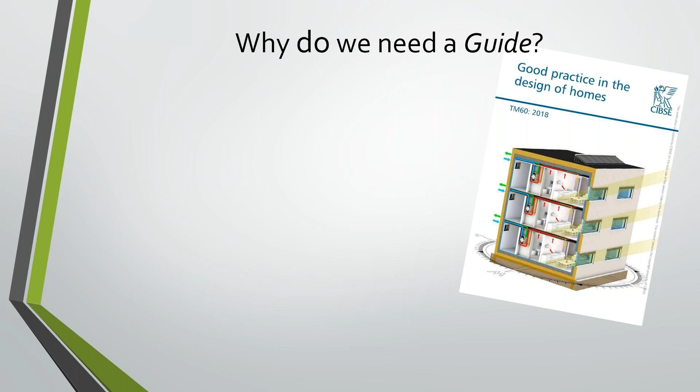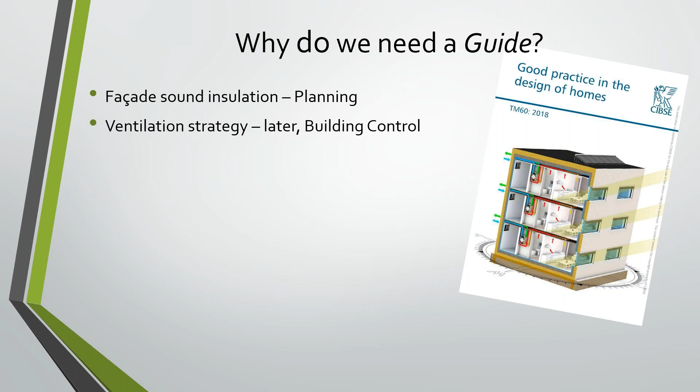Our experience, if we look at the current state of the industry - what goes on at the minute? Where we carry out facade sound insulation assessments, these are required for planning, as Ben mentioned. So the assessment is considered usually by the Environmental Health Department, who the planners refer to on matters of noise. The ventilation strategy may not even be determined at the planning stage, and it's going to be monitored through the building control process anyway. Because building control and planning are separate functions, they don't need to coordinate with each other. So there may be assumptions about the windows being closed to achieve reasonable internal noise levels in the facade assessment, whereas the ventilation strategy may actually require windows to be open for part of the year to achieve reasonable internal air quality.

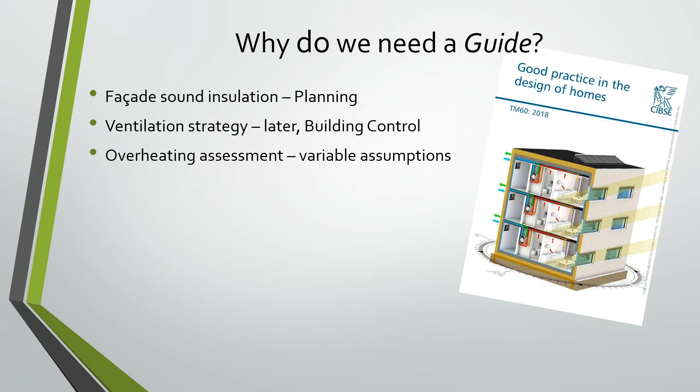We know that overheating assessments aren't regularly carried out everywhere at the minute, but here we have the assumptions. What we always suspected was that the overheating assessment may assume that windows will be open, when the facade sound insulation assessment will assume that the windows will be closed.

My colleague Nick Conlan presented a paper at the Institute of Acoustics just on Monday of this week, in which we reviewed 160 planning applications in London between 2014 and 2017. We just looked at the major developments for more than 100 dwellings. What we found was that 85% of them made this assessment, where the windows were assumed to be open for the overheating assessment and closed for the acoustic assessment.

So what we're doing at the minute is, in general, designing dwellings and allowing people the choice of reasonable noise levels or reasonable temperatures, but not both. So I'm sure you'll agree that's a pretty embarrassing state for our industry, really.

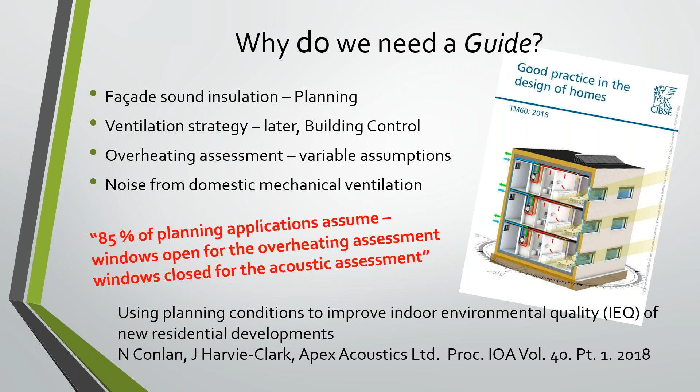We were aware of this a few years ago. There's another issue about noise from domestic mechanical ventilation systems that I'll talk about later on. But first of all, we need to understand the context for noise in the planning process.

So we have the National Planning Policy Framework and the Noise Policy Statement for England, which talk about how noise should be treated in the planning process. We're all engineers, so what we like is clear design criteria that we can design to and know that we can achieve them. But planning refuses to give us clear criteria like that.

Rather, noise should be considered in terms of its adverse effects. So what this means is, if I show you a picture of a dose-response relationship for noise - along the x-axis we have the sound level, and on the y-axis we have the prevalence of high annoyance. Each one of those dots within that graph is the result of a separate study on the prevalence of annoyance depending on the sound level. You can see the extremely wide range of responses in terms of annoyance to different sound levels that you get in practice.

What planning says is that we need to mitigate and minimize when the sound level goes above what's called the LOAEL, or the lowest observable adverse effect level. Whilst noise might have an impact on health and well-being but doesn't have any adverse effect, we don't need to worry about the level.

Let's say that's there, for example. Below that level, there's no acoustic constraints in the design. Above that level, we need to mitigate and minimize as far as we can, until we get to a higher level where there's a significant observable adverse effect level.

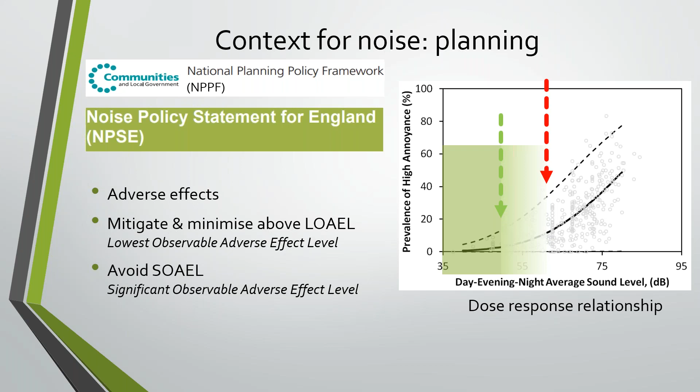We should avoid any impacts above a significant observable adverse effect level. So although there's wide consensus on where that green dotted line may be for different room types, for daytime and nighttime, bedrooms and living rooms, there's not much consensus on where the SOAEL might be for different types of living rooms, bedrooms, and at different times. And planning itself refuses to give any numbers because that suggests that in different contexts, different noise levels may be acceptable.

So to fill the void in the absence of guidance, as Ben mentioned again, the professional practice guidance on planning and noise was produced last year by a group of people who were members of the Institute of Acoustics, Chartered Institute of Environmental Health, and the Association of Noise Consultants.

This describes what good acoustic design is, so how to consider acoustics from an early stage in the design process, in the site layout, orientation of buildings, so that as many residents as possible can enjoy reasonable internal noise levels with open windows. But it says where you rely on closed windows to achieve reasonable internal noise levels, then you should design the accommodation so that it provides good standards of acoustics, ventilation, and thermal comfort. It says that because our group in the Association of Noise Consultants suggested that would be suitable text.

So we've been working since about 2016 to put this guidance together. We're composed of members from across the industry, both independent consultancies and multidisciplinary consultancies. We've also had some input from environmental health practitioners and some mechanical engineers. So I'll hand you over to Anthony now to talk to you about the contents of the guide.

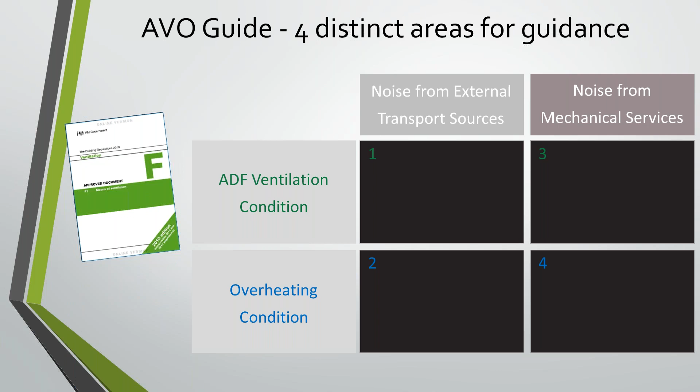There are basically 4 conditions, arising from the combination of 2 different environmental conditions and 2 different sources of noise. The environmental conditions are the ventilation condition, when you're providing ventilation as described in Approved Document Part F, and the overheating condition, when you're applying measures required to meet your overheating criteria, for example as described in TM59. So the ventilation condition is the top row in the table, and the overheating condition is the bottom row.

Then you have the different sources of noise: noise from mechanical services, which is the right-hand column, and noise from external sources, so noises outside the building that break into the building, particularly via ventilation openings. At this stage we've limited the scope to transport sources for simplicity.

In terms of how we've approached the guidance, for mechanical services we've made reference to the CIBSE A guide, and Jack will talk in more detail about that later. For noise from external sources, for the ventilation condition, we've made reference to British Standard BS 8233, which is a quite central document for acousticians, and I'll talk about that in a second. For those 3 conditions we're really just clarifying the situation by referencing existing guidance, whereas for the overheating condition with noise from external sources, there isn't really any existing guidance—that's basically the situation of open windows.

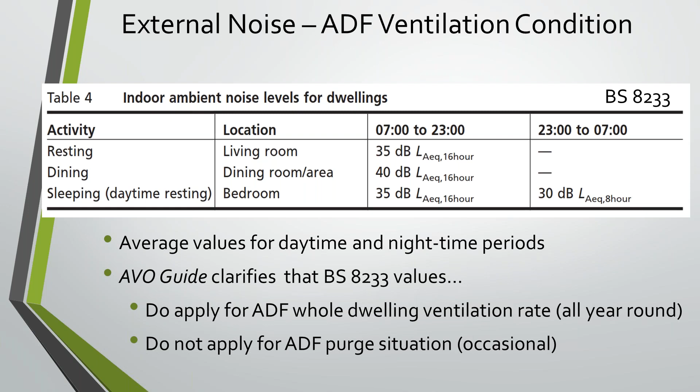The implication of this is that if you're trying to achieve these BS 8233 target levels inside your building, then only certain types of Approved Document Part F ventilation systems may be appropriate depending on your external noise level. That's because the different systems provide different levels of sound insulation from outside, on account of the fact that they require different openings in the facade.

So if we take the case of a bedroom at night where we're trying to achieve 30 dB inside the room, if you were to use a Part F System 1 or System 2, you'd require trickle vents in the facade, and that effectively limits the sound insulation such that you can only really use that system for external noise levels up to around 53 decibels at night. I'd just make the point these are approximate values, because it depends on the details of the geometry of the room and so on, but these are rough figures.

If you then move to Part F System 3, mechanical extract ventilation with trickle vents, you've still got the trickle vents, but now they can be smaller because you have a mechanical driving force, and they can also potentially be attenuated, meaning you can consider that system for higher external noise levels up to around 63 dB. Finally, if you use System 4 MVHR, it's fully ducted. There are no openings in the facade, which means the facade insulation is limited only by the other elements of the facade construction, particularly the glazing.

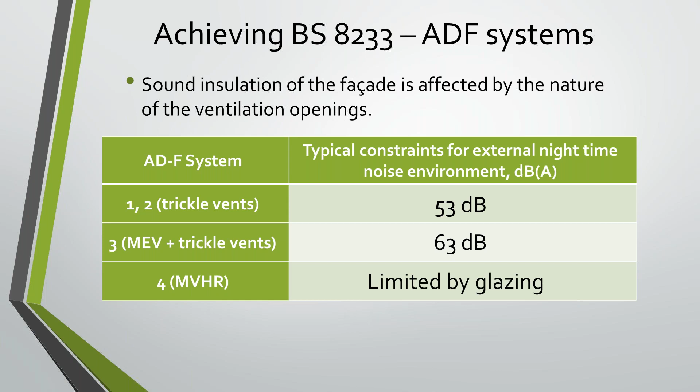Okay, so that's covered box 1.

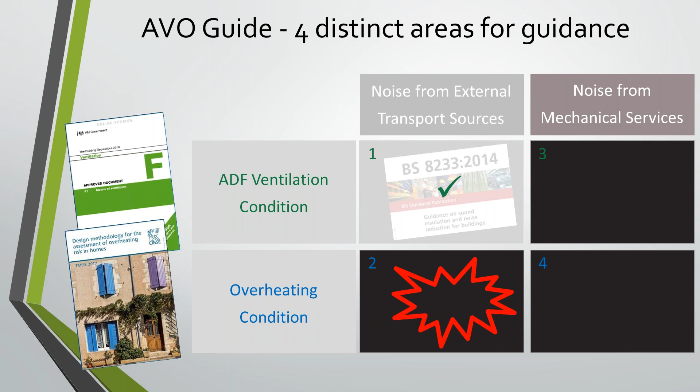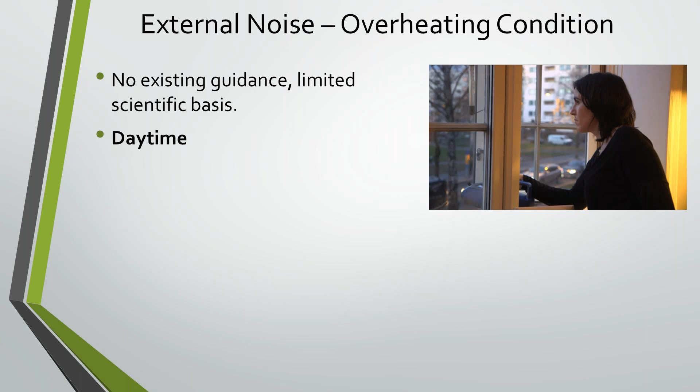Now I'm going to talk about noise from external sources for the overheating condition, so box 2. This was the tricky one because we didn't have any existing guidance we could reference. What we needed to do was think about the noise effects relevant for residential. For daytime, we looked at interference with activities, which particularly comes down to speech. At nighttime, we looked at sleep disturbance. Having identified these effects, we then interrogated a whole load of documents from across Europe to look at guidance which might be relevant.

Based on what we could find, we generated this table, which sets out risk categories determined by the internal noise levels in the daytime and nighttime period. It's set out in quite a similar way to the table in Table 4 from BS 8233. So let's just run through these risk categories.

To start with, we have the negligible risk category at the top, which is equivalent to saying you achieve the values in Table 4 of BS 8233, i.e. that the noise level in your overheating condition is no different from the noise level in your ventilation condition, so that's clearly not a problem.

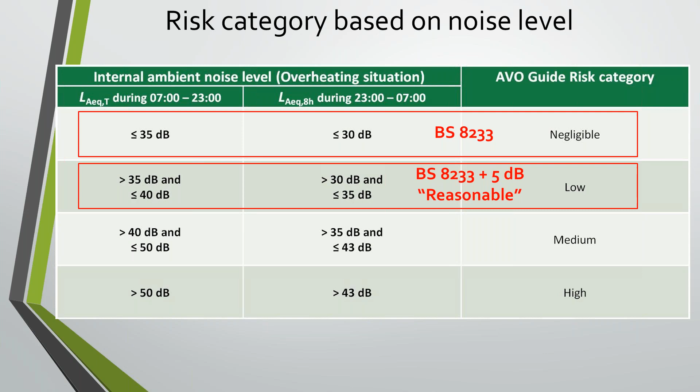The low risk category is equivalent to saying you don't exceed the 8233 values by more than 5 dB, and the reason for that is there's a note in 8233 which says that corresponds to reasonable conditions, so we felt that's a low risk.

The high risk category is defined by the point at which the noise starts to significantly have the effects described. In the daytime, that's the effect on speech communication, and we suggest that above 50 dB inside, speech communication is significantly affected. At night, above 43 dB.

A sizable proportion of the population is highly annoyed and sleep disturbed, and we've derived this figure from some guidance by the WHO night noise guidance, which actually gives the analysis in terms of an external noise level of 55 dB, and we've converted that to 43 internally by assuming that a simple open window for overheating control will give a level difference between inside and outside of roughly 12 dB.

But what about the medium risk category? What do you do with that? How do you assess that category? The key thing is that the adverse effect that comes from noise, which is what's relevant for planning, depends not just on the noise level, so not just where you are in that table in terms of the level, but also on how often you're exposed to that noise level.

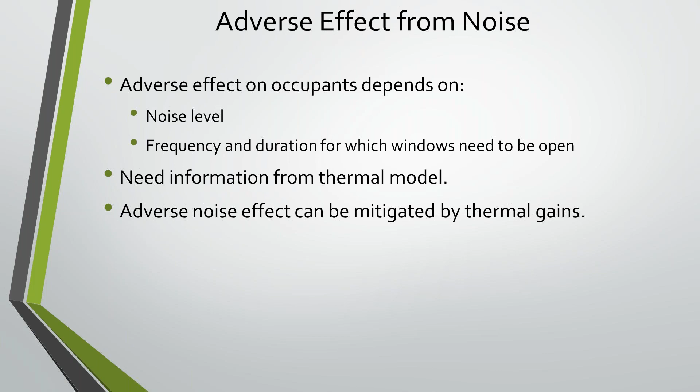There's also the implication that adverse effect from noise can be mitigated not only by reducing the level of noise, but also by reducing thermal gains, because that would reduce the amount of time for which you need to open your window and therefore reduce the effect.

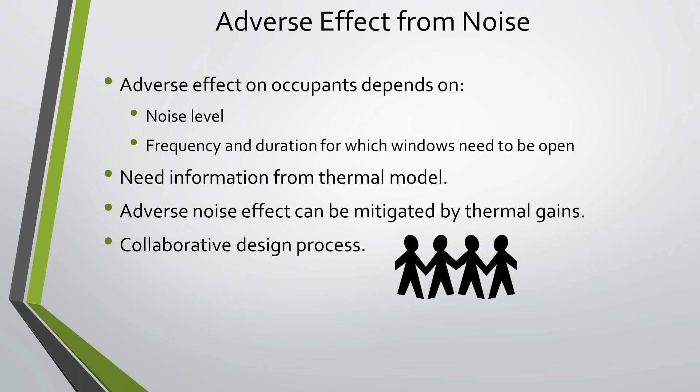So all in all, this comes back to the idea of having a collaborative design process. The document is trying to promote a situation where acousticians come to the design not just presenting constraints, as in saying look, you can't open the windows, which I think is currently a bit how it's perceived, but instead trying to get acousticians aware of the interrelationship between overheating, ventilation and noise, so they can come forward in a more positive way with design solutions and a more joined up process.

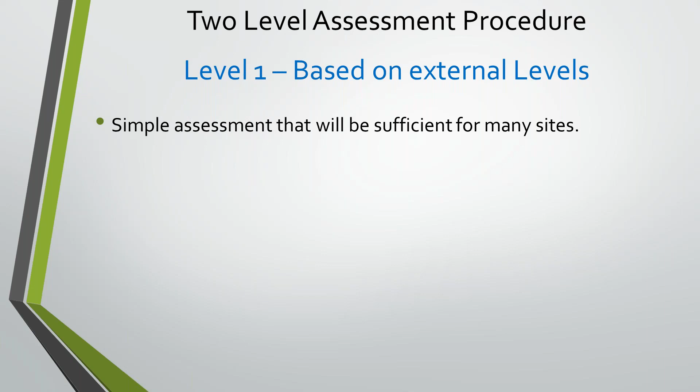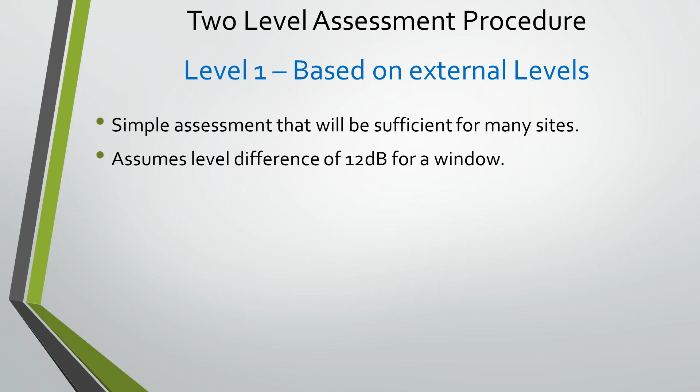Level 1 is based on external noise levels, so the acoustician can simply go to site, measure the noise level and directly do the assessment from that. To make this a simple assessment, we've had to make simplifying assumptions. The key one is that we've assumed the overheating control method is a simple opening window that gives a level difference between inside and outside of roughly 12 dB, i.e. your internal noise level would be 12 dB less than outside when you've got the window open. So that allows you to make the assessment by simply adding 12 dB to the levels in the risk category table presented earlier.

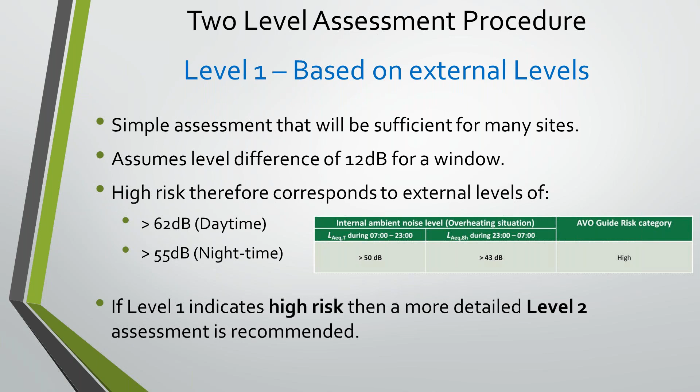For example, you will be in a high risk category if your daytime noise level is over 62 dB externally, or if your nighttime noise level is over 55 dB. If this level 1 assessment indicates you are in a high risk category, we're recommending you then do a level 2 assessment, because that's an indication that opening windows aren't a good strategy and you need to do something else.

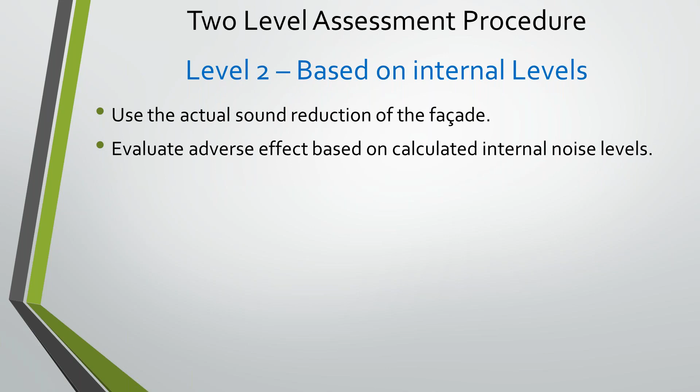The level 2 assessment is based on internal noise levels. So instead of just assuming opening windows, you look at the actual design of your facade and the sound reduction it will achieve. Then you evaluate the internal noise levels from the external noise levels and the sound reduction of your facade, and make an assessment of adverse effects with reference to the risk category table based on the internal noise levels.

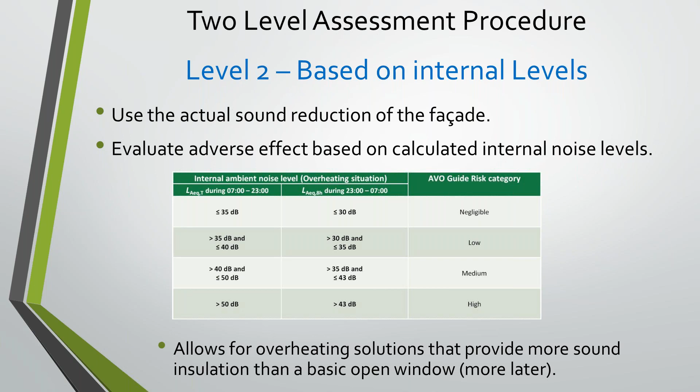That's obviously a more involved procedure because there's more calculation, but the advantage is it allows you to consider designs for controlling overheating that provide a greater degree of sound insulation than you'd get from a basic open window - for example, attenuated vents, which I'll come back to a little later in the presentation. At this point I'm going to hand back over to Jack, who will discuss noise from mechanical services.

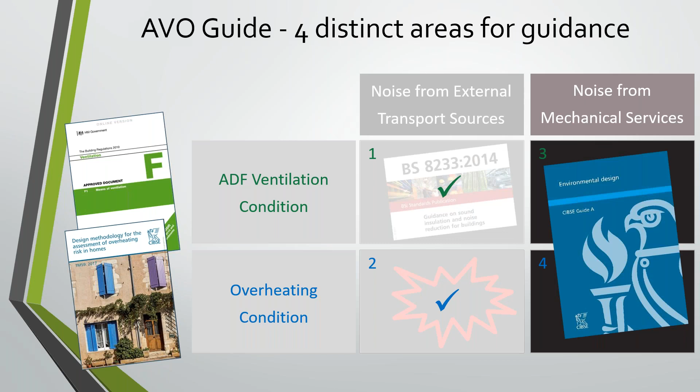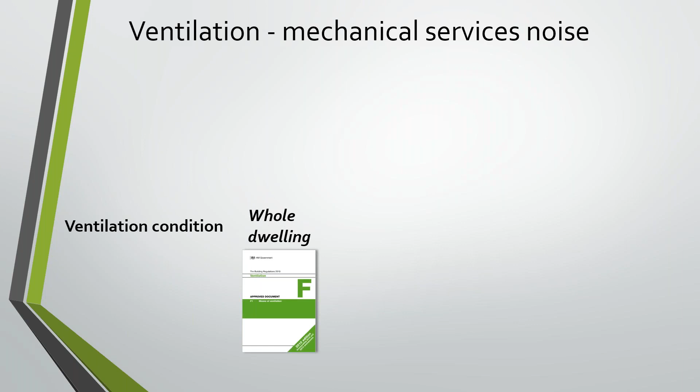Thank you, Anthony. I'm going to talk about how we approach the issue of noise from mechanical services for both ventilation and overheating. Thinking about ventilation first, and distinguishing between the whole dwelling ventilation rate and the extract ventilation condition - there's guidance in Approved Document F that continuously running systems shouldn't exceed 30 dBA in bedrooms and living rooms at the minimum low rate. So we refer to that.

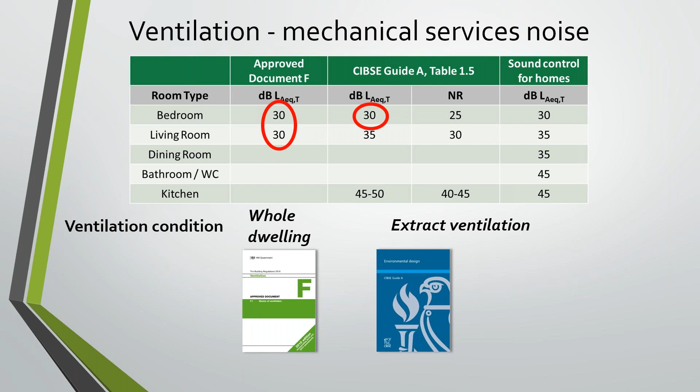For extract ventilation, CIBSE Guide A doesn't appear to distinguish between the different parts of the ventilation condition, but fortunately refers to the same level of 30 dBA in bedrooms, and allows a slightly higher level in living rooms. We also refer to an older publication, Sound Control for Homes, because it has criteria for other room types. There is a question, though, about whether 30 dBA is suitable for bedrooms.

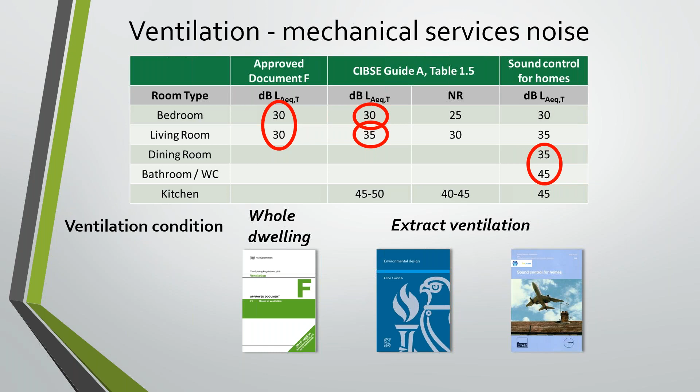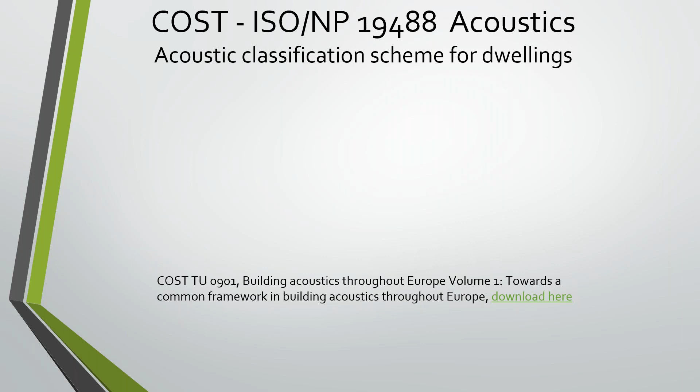There was a big European collaboration of acousticians within the COST Action TU0901 that resulted in ISO 19488, just about to be published. It's an acoustic classification scheme for dwellings, and contains this table for sound levels in buildings due to service equipment - again not distinguishing between ventilation or cooling systems. The highest class requires sound levels less than 20 dBA. You can see that 30 dBA would be class D, suggesting 20% occupant dissatisfaction, or 35 dBA would be class E, with 35% dissatisfaction expected.

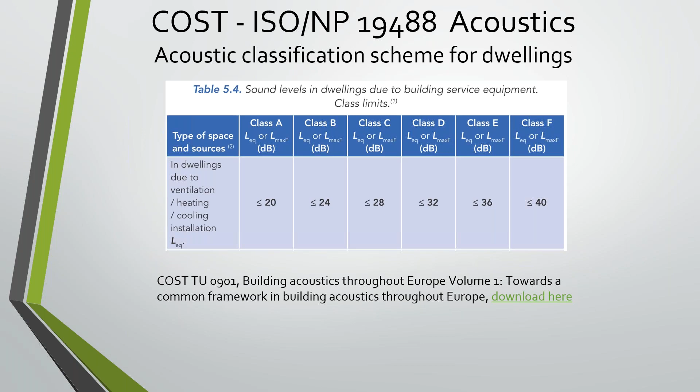If we dig a little deeper and look at the actual evidence for people's tolerance of sound levels in their own homes from domestic mechanical ventilation systems, the best information we have, or really the only information, is from a study in Finland in 2007. It was quite extensive, 102 homes, investigating the then Finnish building regulations for half an air change an hour and a sound level limit of 28 dBA.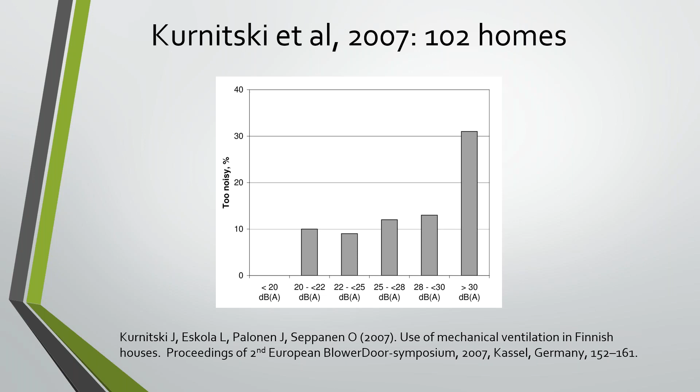Because it's a cumulative distribution, if we move across the columns to the right, by the time we get up to 30 dBA and add up all those columns, there's more than 40% of people finding that too noisy. This study found that what happened in practice was people turned their systems down or turned them off entirely until they could tolerate the noise. So they operated their ventilation systems based on their noise tolerance, not on the ventilation needed to achieve reasonable internal air quality.

This finding has been found again by other studies across Europe, particularly those that have adopted mechanical ventilation in the same way that we have in the UK, which you might describe as rather haphazard and uncoordinated. They've subsequently introduced a mandatory noise limit in the Netherlands to control noise because it was such a big problem there. A more recent study in Canada...

described that it was the noise in the bathrooms that people objected to, turning their fans off and not turning them on again. This time it wasn't the level of the noise, but just the quality of the noise that caused the problem.

So what do we know about what's happening in the UK then. The Zero Carbon Hub started investigating this because they realised there was a problem, and they found the same type of thing, although on a rather smaller study. People are turning their systems off because they're too noisy. Our experience is that people often don't report this - they turn them off and then report they have no problems with the noise from them. But obviously, if they live in an airtight house, they will suffer the adverse effects of poor indoor air quality.

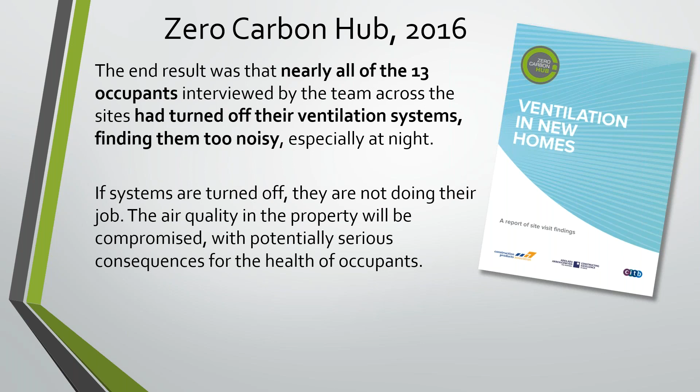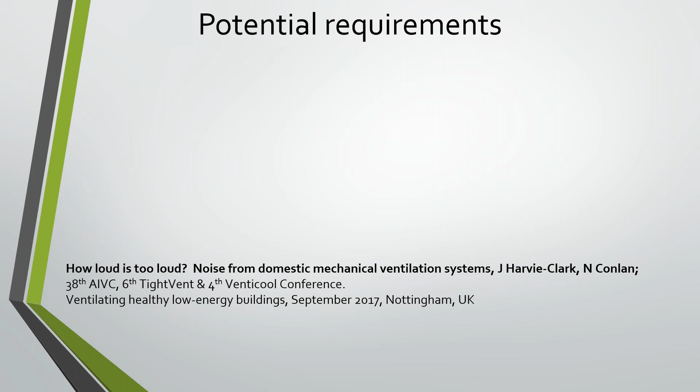So we think that potentially to avoid these problems - and you can read all about this in the paper, which you can get off our website - 30 dBA is likely to be widely unacceptable, and an optimal limit to avoid adverse effects is likely to be around 24 dBA, we think, and higher levels may be acceptable if the quality is okay.

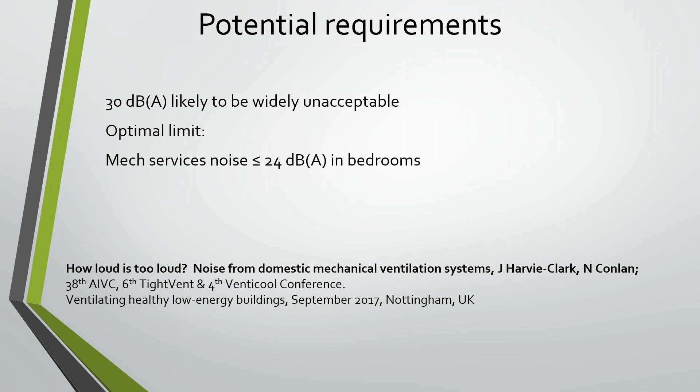So we're currently involved in a bid to the EPSRC to try and get to the bottom of this. Now, this is not in the guide at the minute, but we'd be very interested if any of you have any experience of people complaining about sound levels from ventilation systems and whether you've had any measurements of the sound from them.

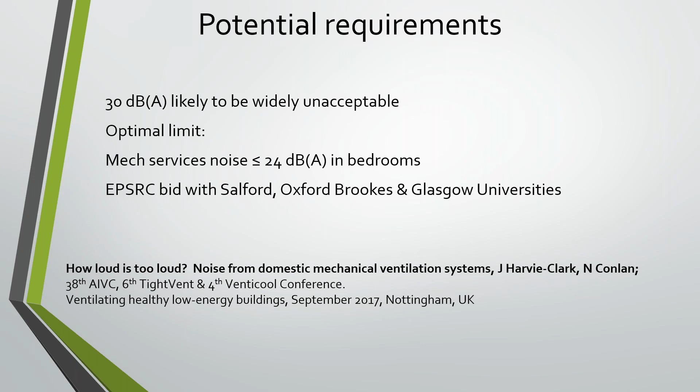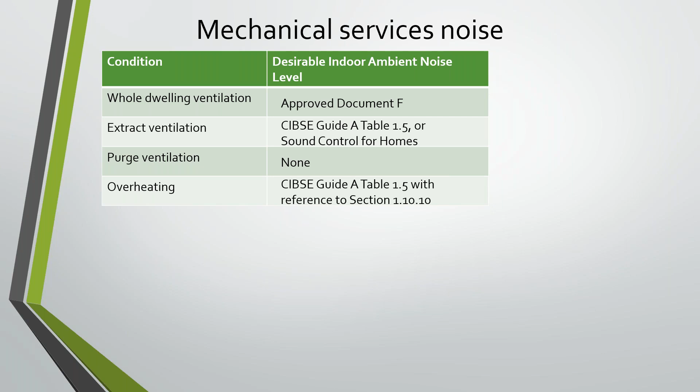So summarising the mechanical services noise issues: we're referring to Approved Document F for whole dwelling ventilation, the CIBSE Guide A for the extract ventilation condition, and as for external sound and purge ventilation, whilst providing purge ventilation for air quality purposes, as opposed to controlling overheating, there's no acoustic criteria associated with that. And for overheating, simply referring back to the CIBSE Guide again, but with particular reference to section 1.10.10, which says that a range of plus or minus 5 dB may be acceptable depending on the particular situation.

So think of it this way: you go into a hotel room, you turn on the comfort cooling system, it's a bit noisy, but you don't mind because when you want it to be quiet, you can turn it off again once you've got the cooling you need. So there may be times when a higher level may be acceptable for overheating where it's under the occupant's control.

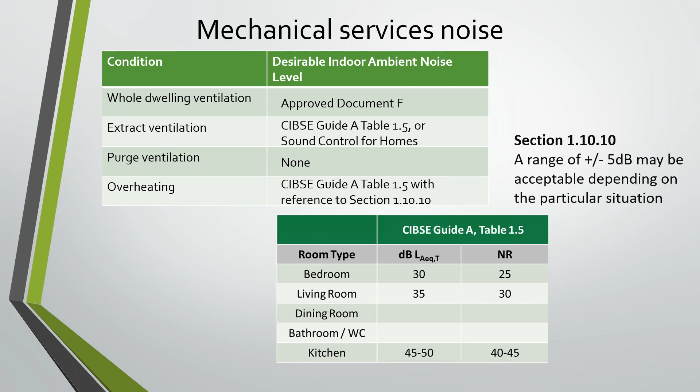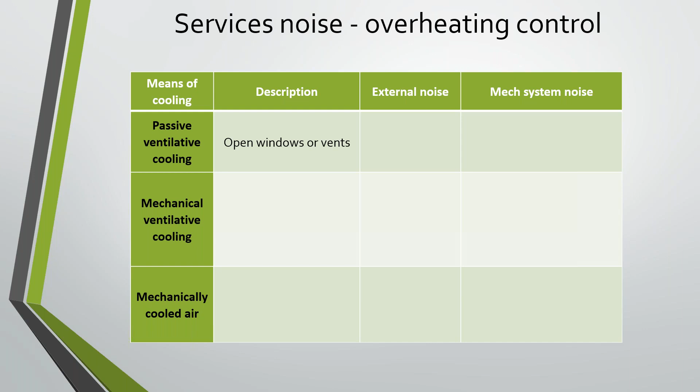So providing advice for acousticians on services noise levels and overheating control is something we do in the guide, because many acousticians aren't aware of the details of ventilation and provisions to mitigate overheating. Passive ventilative cooling obviously relies on openings in the facade, as Anthony described, so it's all about the external noise. And there aren't any mechanical systems noise issues unless ceiling fans are used.

Mechanical ventilative cooling, if suitable or appropriate, doesn't have external noise level limits, but there are likely to be much higher flow rates than required for whole dwelling ventilation rates. So there's noise from the fans and regenerated noise at grills. There is a question about whether using an MVHR system in a boost mode is suitable.

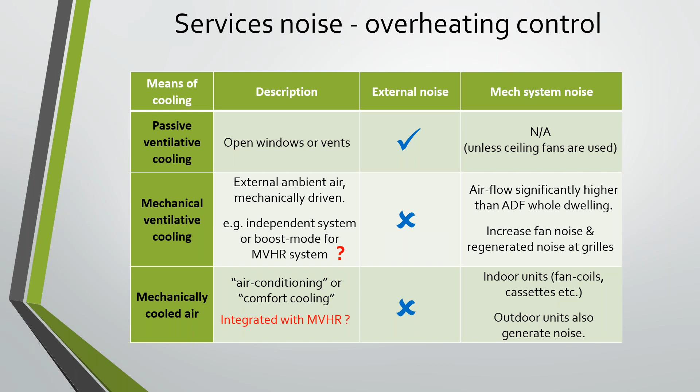Using a mechanical cooling system doesn't have any external noise issues in terms of the internal environment, but the indoor units have a noise issue, and it's worth remembering that the outdoor units also generate noise. We are aware of some manufacturers integrating a small amount of cooling within their MVHR systems, transferring heat from the supply to the exhaust duct so no additional equipment is required, and maybe this will be the way they go in the future.

So I will hand back over to Anthony now to talk about design solutions.

Okay, so I'm now going to talk a little bit about some design solutions, particularly passive options for the control of overheating, and then also follow that up with a couple of case studies using those kind of passive approaches.

This chart shows a number of options for passive ventilative cooling. By passive ventilative cooling, I mean providing external ambient temperature air at a higher flow rate in order to mitigate overheating, but without the use of any fans or mechanical systems. The x-axis shows the outside to inside level difference in decibels, the difference between the noise level outside your building and the noise level inside your room.

Along the y-axis, you have 4 different types of solution. The reference one is obviously the standard window, which provides a level difference of approximately 12 dB, give or take, and that was the value we've used in the guidance earlier. You can see that the amount of sound insulation can be improved by using one of these other solutions, and I'm going to run through those now.

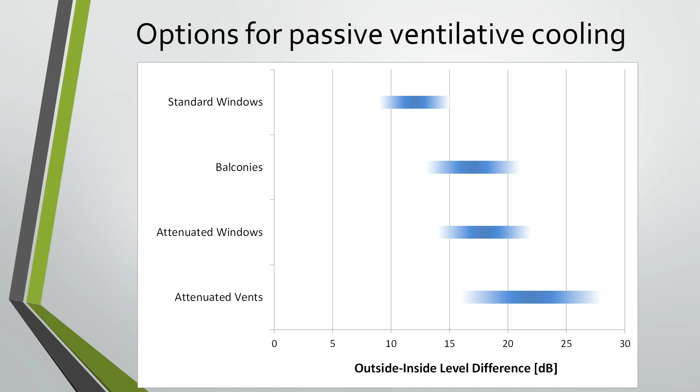For balconies, the simplest type for providing some enhanced sound insulation is to have a balcony that has a solid balustrade and an acoustically absorbent underside to the soffit of the balcony above, so that you don't get a reflection of sound off that balcony. Depending on the geometry of the balcony and on the geometry of where the noise source is, you can get 3 or 4 dB improvement from this kind of balcony.

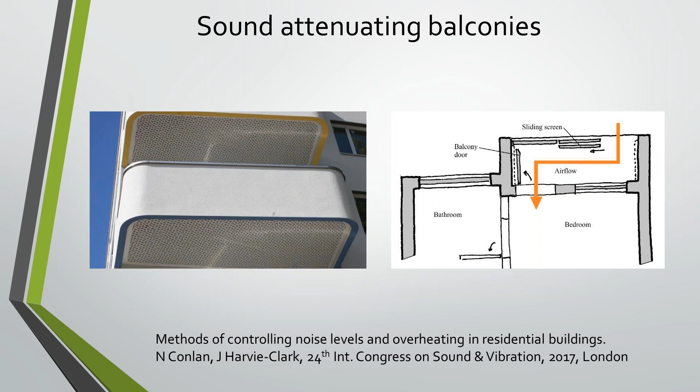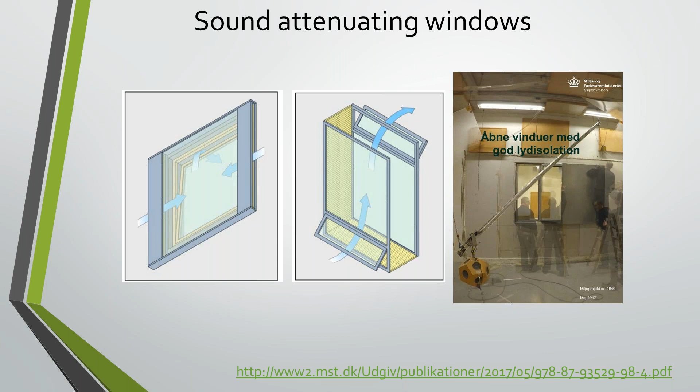For windows, there are ways of designing windows so that they provide better sound insulation than a simple window. One option is along the lines of this study done in Denmark, where a secondary glazed window with offset openings was used, with an acoustically absorbent lining to the reveal of the cavity between the two windows. Again, you can find more information in the study linked below.

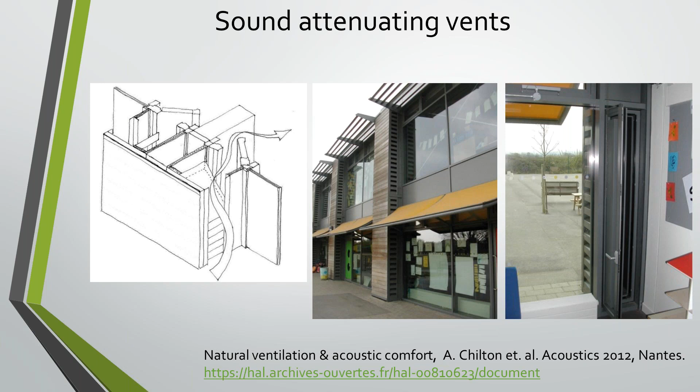Now I'm going to show a couple of case studies, both residential projects, using the attenuated vent type of solution. The first one is Northwest Cambridge, Lot 5, accommodation for graduate students in Cambridge. It was designed by RH Partnership Architects, and the M&E and acoustic design was done by ACOM. Alongside the windows, there's an acoustically attenuated ventilator.

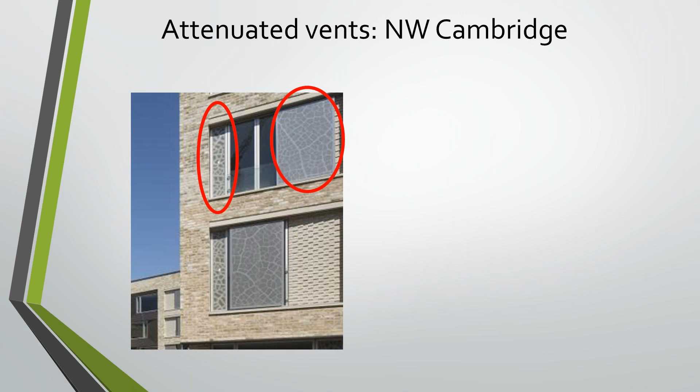The design also includes an external shade, which limits your solar gains and therefore impacts the noise effect, because it reduces the amount of time the ventilator needs to be open in order to meet your overheating targets. This image shows the ventilator from the internal view.

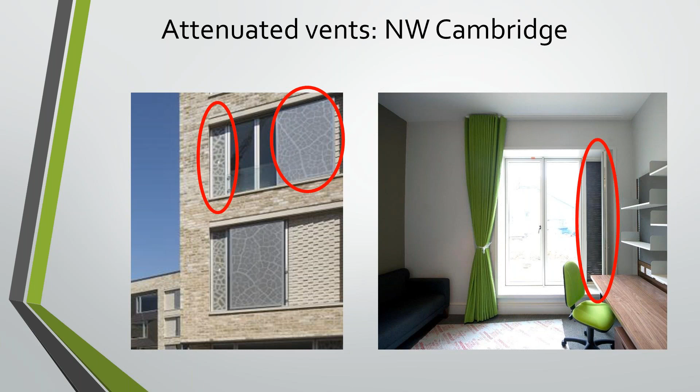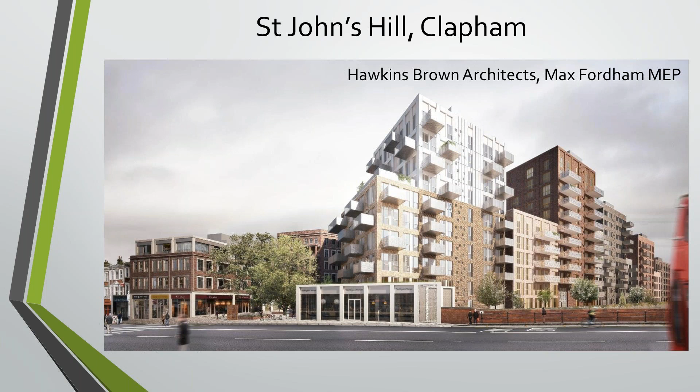These acoustic louvers were approximately 1 meter squared in face area, and about 40% free area, providing a ventilation area of about 0.4 meters squared.

For this project, if you're interested, there's a link on the final page of the presentation where you can go to our website and listen to audio recordings done in the completed building, comparing the situation with the window open versus the vent open.

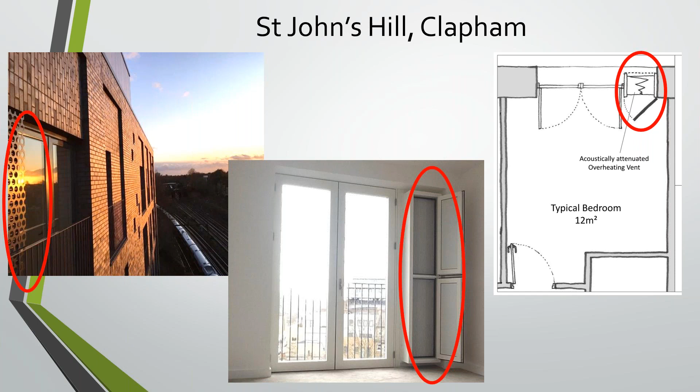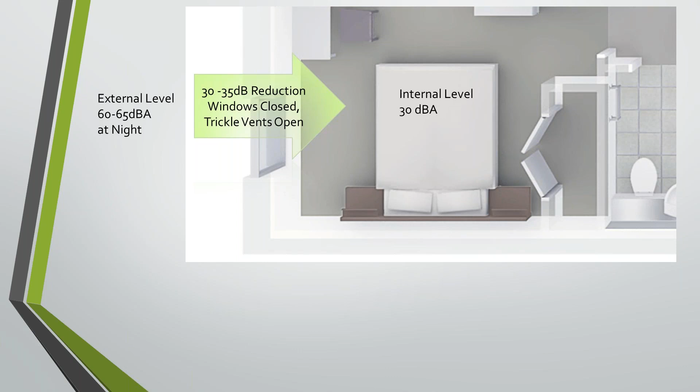To explain the strategy, both designs are quite similar, so I've combined them into one slide. The external noise levels at the sites were approximately 60 to 65 dB at night outside the building. When the windows and acoustic vents were closed, with just the trickle vents open to provide Part F ventilation, the sound reduction of the facade was about 30 to 35 dB, allowing us to meet 30 dB inside bedrooms at night, consistent with the recommended value in Table 4 of BS 8233, discussed earlier.

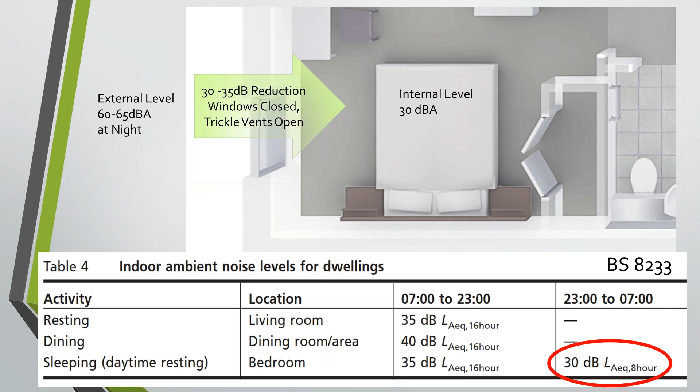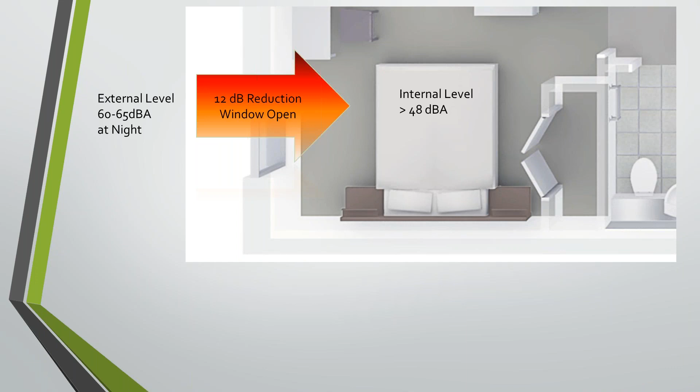But when the window is open, you only get a sound reduction of approximately 12 dB, meaning the internal level is going to be at least 48 dB, probably quite a bit more. In the context of the risk categories in the table presented earlier, that puts you well into the high risk category, so it's clearly a problem.

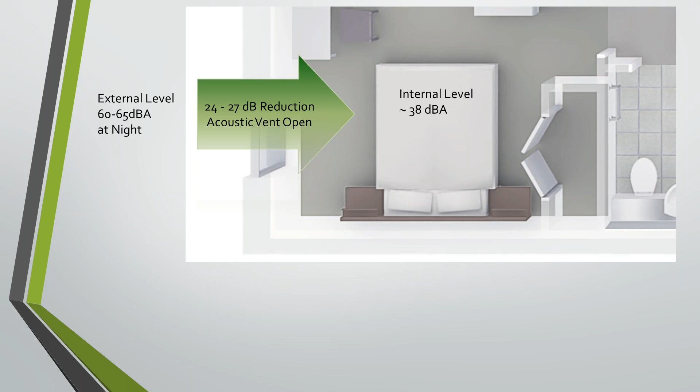That's why the acoustic ventilator solution was considered. When you have the window closed but the acoustic vent open, you can get a level difference of 24 dB, which was at Northwest Cambridge, or 27 dB, which is what we measured at Clapham. That means internal noise levels can be kept to approximately 38 dB internally while providing mitigation of overheating. Again, in the context of the AVO risk category table, you can see that puts you roughly in the middle of the medium risk category.

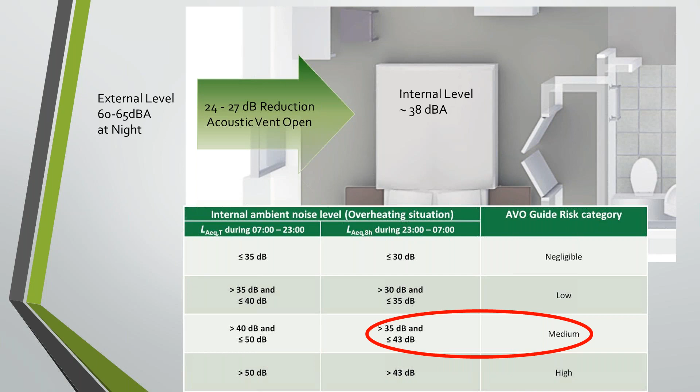Both of these projects were actually designed before the guidance was produced, so this is kind of reverse engineering things a bit, but it just provides some context of how those designs worked. Okay, now at this point, Jack is going to talk about design process.

Thank you, Anthony. So I'm going to talk a little bit about the design process and integrated design first of all. We have information about what constitutes good acoustic design in the ProPG, which is how to consider acoustics from an early stage in the process, so that you minimize the number of places where occupants need to rely on closed windows to achieve reasonable internal noise levels.

But we know that in practice, it's not always feasible to design your site all around the acoustics, or any of the other single discipline aspects, because developers usually want to get as many units as they can on a site.

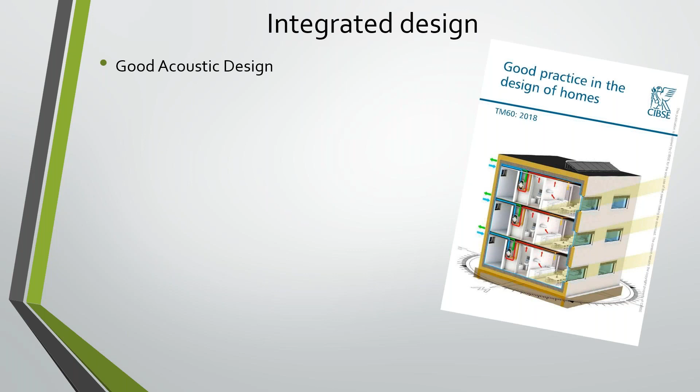TM60, as I mentioned before, also talks about the need for integrated design in dwellings, and I think this is summarised quite nicely in the London Plan Policy 5.9. We're trying to get a balance between good internal environmental quality for the occupants, but without excessive energy use. It's also important to consider that those aspects aren't assessed on the same balance, because energy is assessed in a different context from internal environmental quality, which is considered in planning.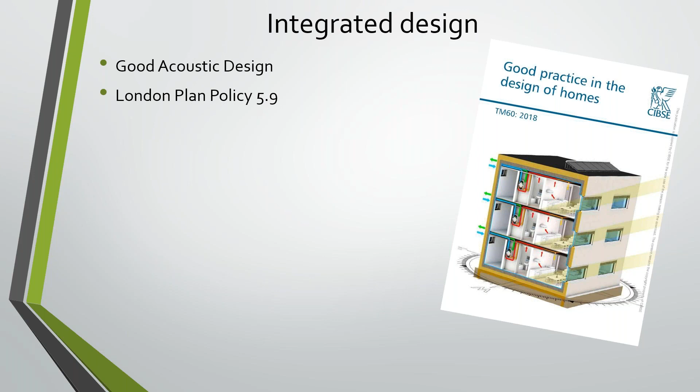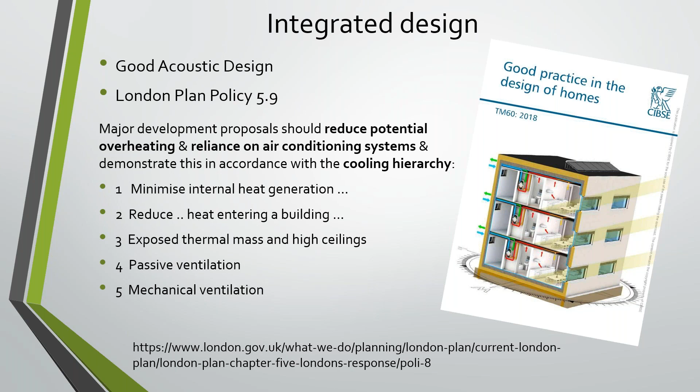The London Plan Policy 5.9 and the cooling hierarchy talks about minimising internal heat generation, reducing heat entering a building, and using exposed thermal mass and high ceilings. So the context and aspect of the design before it starts talking about services: passive ventilation, mechanical ventilation, and last on the list, active cooling systems.

So we understand when you do your overheating assessment, you have all these inputs into the model that have no acoustic impact, but that the designer, or the design team, has control over. It's not until you get down to the services that you start to have an acoustic impact.

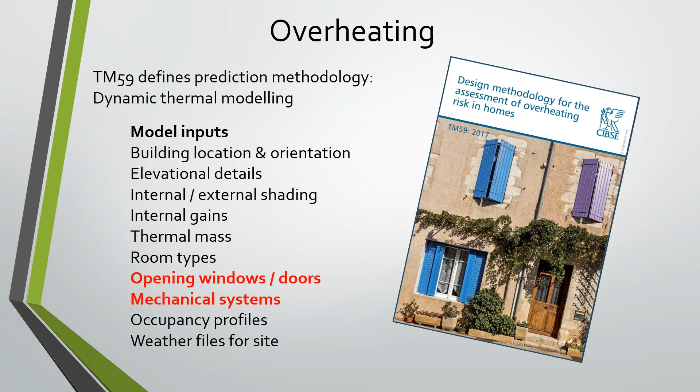And then, of course, you could consider which room types you put on which side of the development to expose them to different levels of noise at different times, if you wanted to. So how much can we, as mechanical engineers, push back into the design team to take a holistic approach to the design, so that we don't just rely on services to control the internal environment.

So looking at the activities that the acoustic designer will undertake with you, we can consider three columns: noise, noise and ventilation, and noise and overheating. And looking at the rows, the process is about gathering information, assessing, and advising.

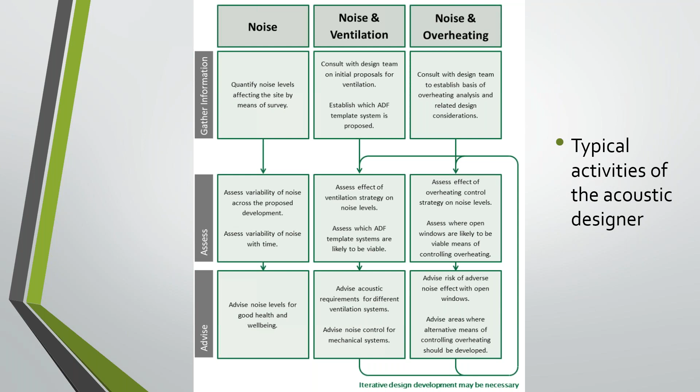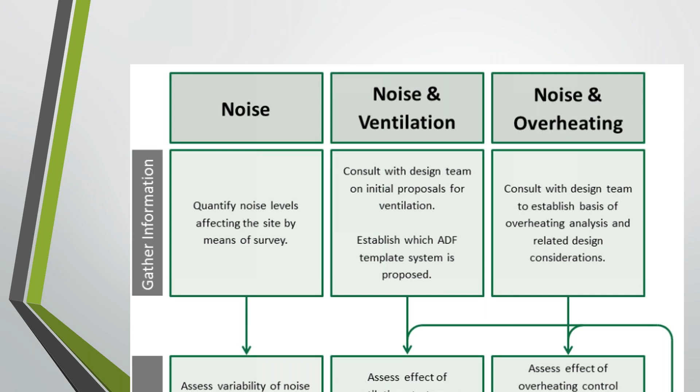Gathering information is about determining what the noise environment is likely to be over the site, and if there are proposals, what they are. From that, you might get a drawing with marked up facades showing where different ventilation strategies may be feasible, or what types of provisions for mitigating overheating might be feasible from an acoustic point of view, along with the noise levels or the risk of the noise.

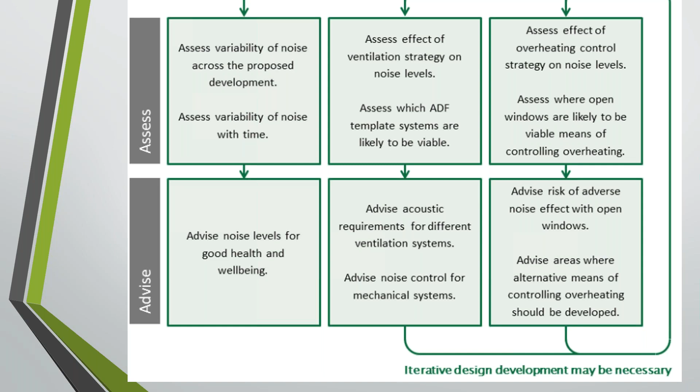So to conclude, this guide, as Anthony mentioned, particularly integrates the aspect of environmental sound with internal conditions. We're not aware of anyone else ever having tried to do this before anywhere in the world, so it is new ground. To make this work, we think you're going to need to embrace your acoustician, and acousticians will need to embrace the mechanical engineers and the rest of the design team.

It's certainly true that we're going to need early engagement if we're going to enable integrated passive solutions. And we think failure to engage early is likely to result in mechanical cooling being used, which obviously we want to avoid from an energy performance point of view.

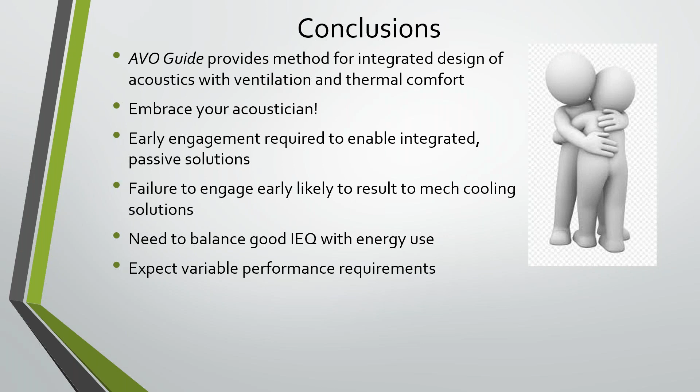We would warn you to expect variable performance requirements from different local authorities, or even on different sites within the same authority, as they take a different view of the importance of internal environmental conditions compared to the need to get residential applications approved. So we will need to develop context-specific approaches and solutions.